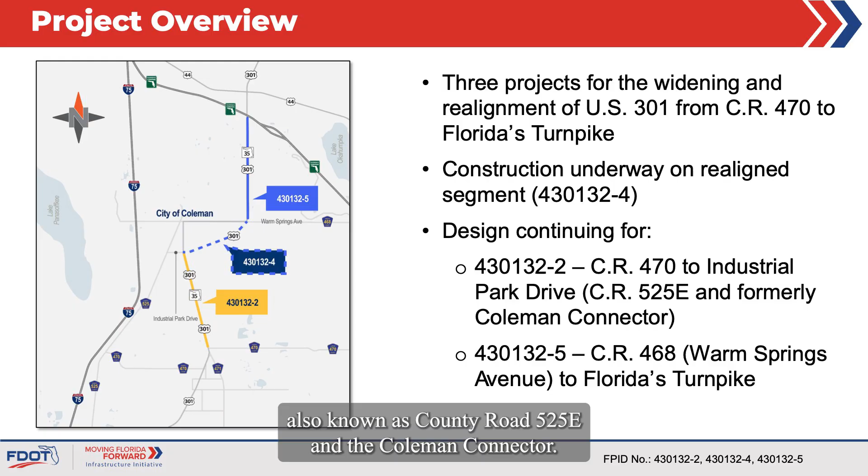At the southern end, Project 430132-2 will widen US 301 from County Road 470 to Industrial Park Drive, also known as County Road 525E, and the Coleman Connector. The other segment is Project 430132-5, which will complete the widening from south of Warm Springs Avenue to Florida's Turnpike.

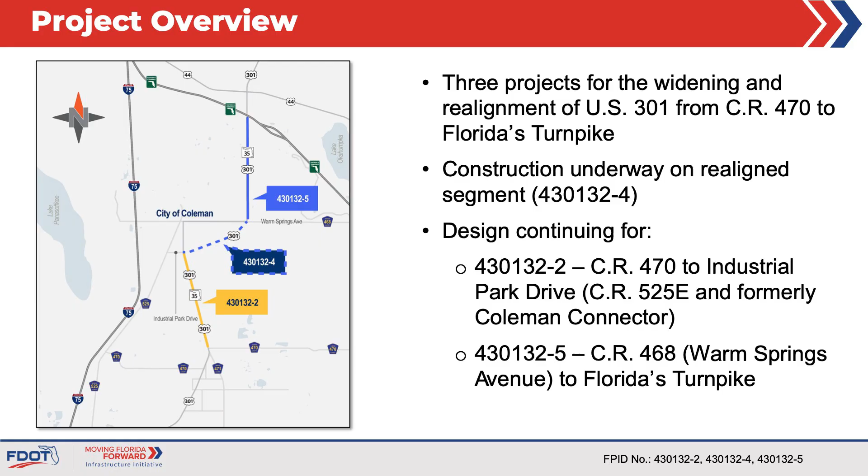The new typical section along US 301 through the entire corridor will have a 12-foot wide outside lane and an 11-foot wide inside travel lane in each direction, separated by a 22-foot to 28-foot wide median. Full and directional median openings, along with left turn lanes, will be provided along the corridor. There will also be 10-foot wide shared use paths on both sides of the road to be used by pedestrians and non-motorized vehicles.

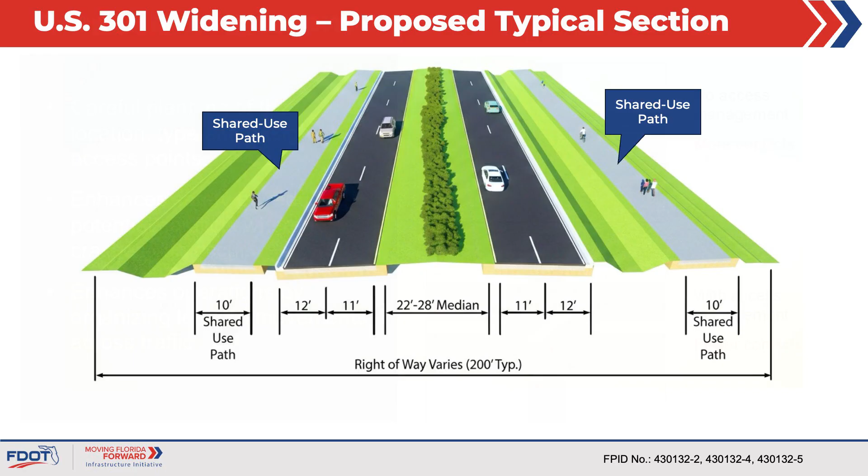One of the most important responsibilities of the Florida Department of Transportation is to ensure that the design of each state road properly balances access and traffic flow. Access management is used to provide this balance. The proposed locations for median openings have been selected using access management principles to enhance safety by reducing the number of conflict points, or places where vehicles could cross paths and crash.

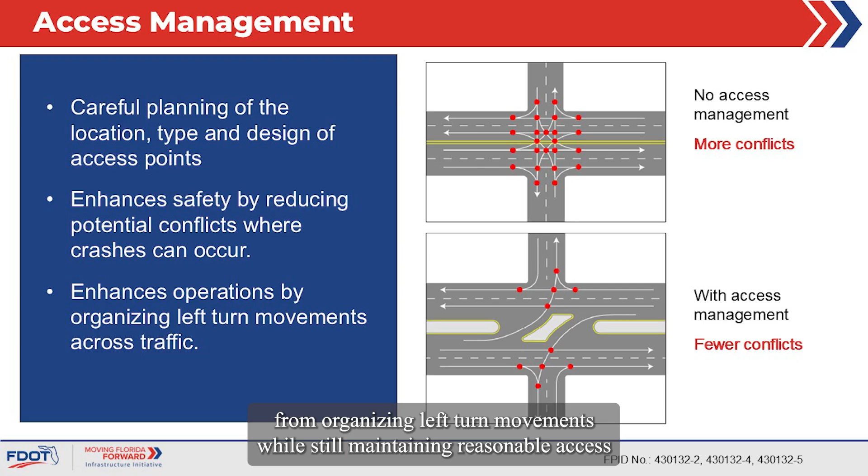The red circles on the diagram on this slide show the reduction in conflict points with access management. Another benefit of access management is better traffic flow resulting from organizing left turn movements, while still maintaining reasonable access to all properties.

First, let's begin with an update on the 430132-4 segment. Construction of the new roadway between Industrial Park Drive and Warm Springs Avenue began in 2025 and is expected to be completed in 2028. During construction, the realigned US 301 will remain closed to through traffic, but will continue to provide access for local residents until the remaining project segments are complete. As part of this work, improvements at Florida's Turnpike have already been completed, helping to relieve congestion in the area.

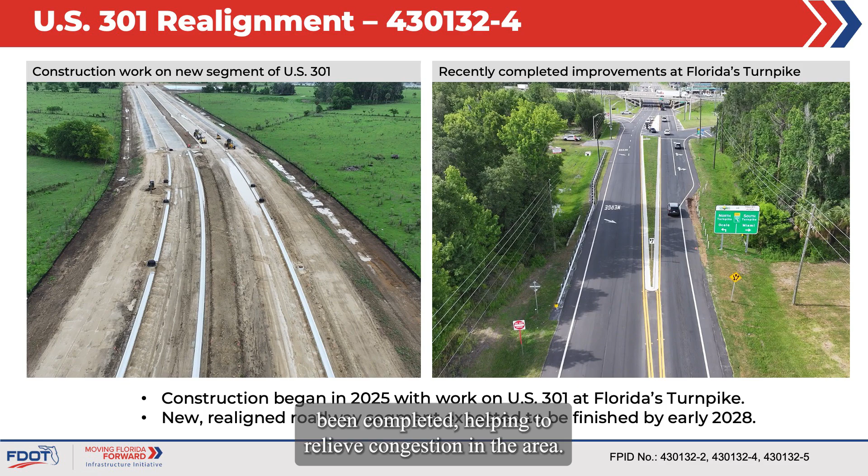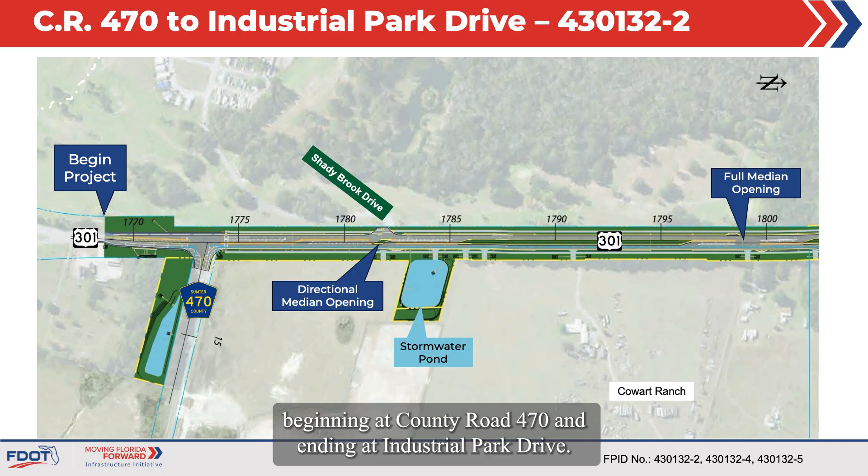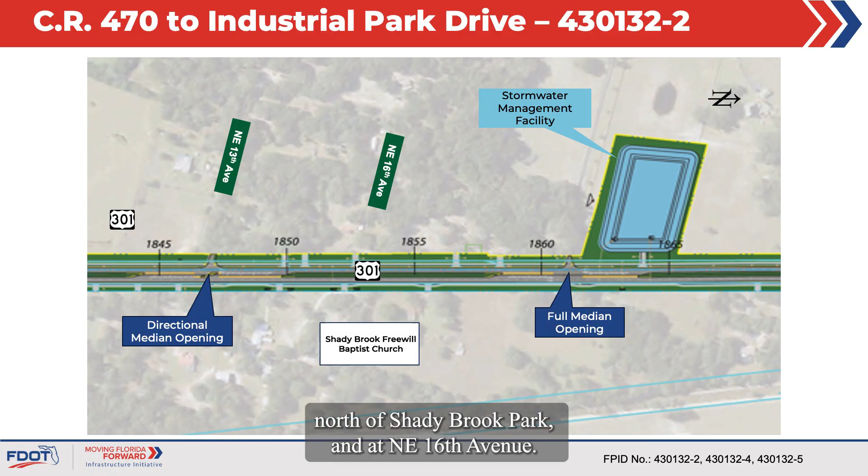Now let's take a closer look at project 430132-2, beginning at County Road 470 and ending at Industrial Park Drive. The aerials on these slides show the planned median openings and stormwater pond locations. Directional median openings are planned at Shady Brook Drive, south of Shady Brook Park, at Northeast 13th Avenue and Northeast 19th Road. Full median openings are proposed north of Cowart Ranch Road, north of Shady Brook Park, and at Northeast 16th Avenue. A new traffic signal will be constructed at the intersection of Industrial Park Drive and the new US 301 alignment.

Now let's take a closer look at Project 430132-5, which starts south of Warm Springs Avenue and will connect to the new alignment. A new traffic signal is planned at Warm Springs Avenue. Directional median openings are planned at Trinity Baptist Church, B&S Auto, south of Northeast 41st Lane, and at Northeast 41st Lane. Full median openings are planned at County Road 521 and Northeast 37th Place. A new roundabout is planned at Marsh Bend Trail.

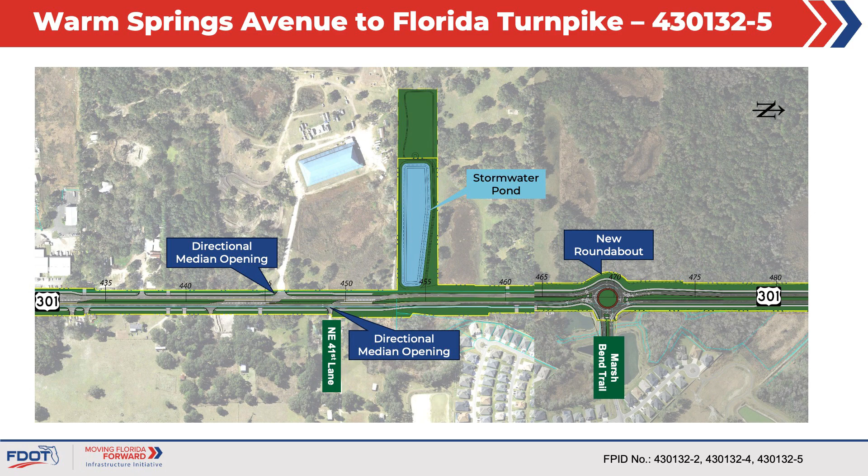The new 2-lane roundabout at Marsh Bend Trail is designed to accommodate all types of vehicles, including large tractor trailers. During design, the department reevaluated intersection options. A roundabout at Marsh Bend Trail was determined to be the most effective option to keep traffic moving and enhance safety. Crosswalks will be included on all 3 legs of the intersection.

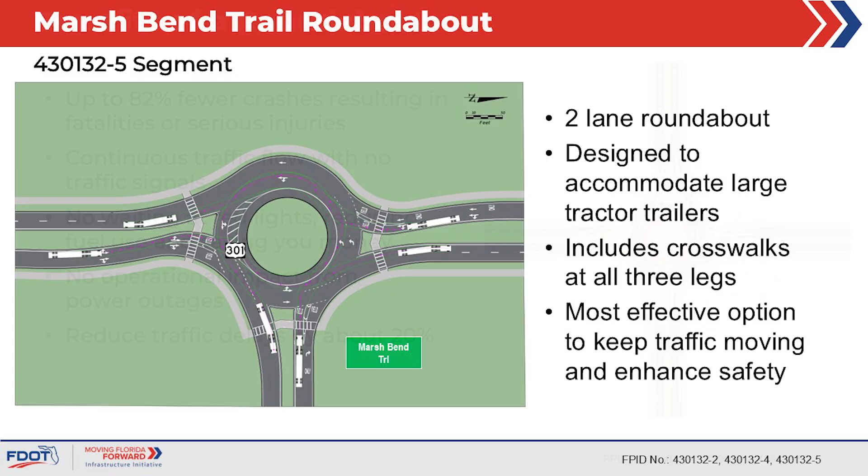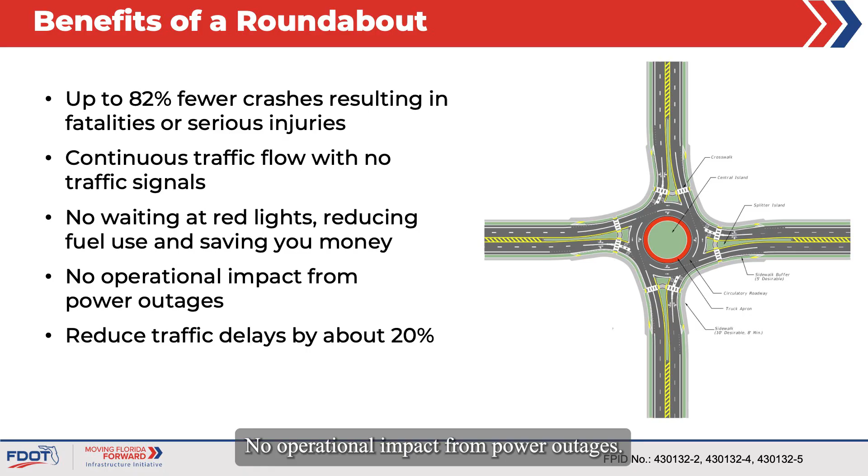Some benefits of a roundabout include up to 82% fewer crashes resulting in fatalities or serious injuries, continuous traffic flow with no traffic signals, no waiting at red lights, reducing fuel consumption and saving you money, and no operational impact from power outages. Roundabouts reduce traffic delays by about 20%.

At the project's north end near Florida's Turnpike, there is a full median opening south of the village of DeLuna, and a directional median opening just south of the Turnpike. The project also includes new traffic signals at the interchange.

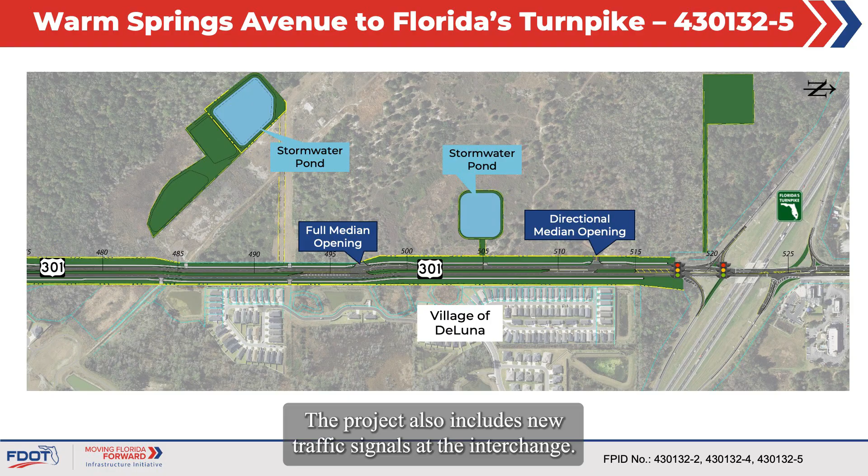Another important feature of the project are new asphalt aprons, which are depicted in the graphic on this slide. The additional paved area provides more space for vehicles making U-turns.

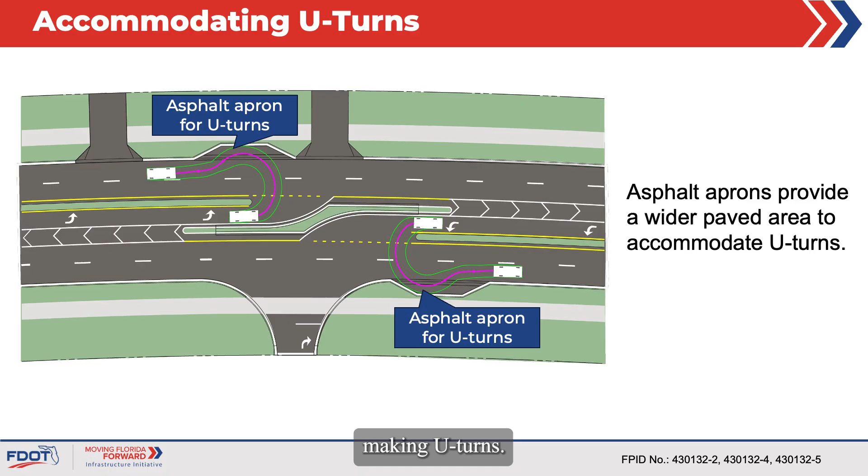Stormwater management is another important component of these projects. The project proposes to upgrade the collection and treatment of stormwater runoff by installing new storm drains and pipes to collect the water and discharge it to 12 new treatment ponds on the project. The treatment ponds clean the water and help control how quickly stormwater is released during heavy rain. There will also be 10 floodplain compensation areas to provide additional green space on the project as a result of unavoidable impacts to existing floodplain areas.

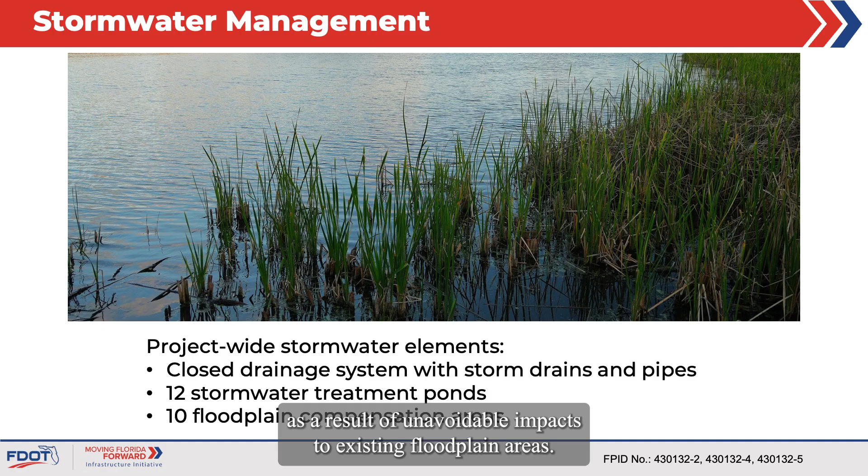As part of the PD&E study, the department evaluated the potential noise impacts. According to state policy, the FDOT can only evaluate the feasibility of including sound mitigation based on existing conditions. The PD&E study concluded no sound mitigation was warranted with this project.

The findings of the PD&E study were published in May 2019, which is considered the date of public knowledge. The FDOT recognizes that many new homes were built after this date. However, according to state policy, the department is not allowed to pay for noise walls for the new developments. The FDOT will be installing landscaping and larger buffer areas and can work with homeowners that may wish to explore private installation.

The Florida Department of Transportation is working individually with every affected property owner and offers relocation assistance to ensure a fair, supported transition throughout the acquisition process. The right-of-way will impact 127 parcels. There are 4 residential relocations and 5 business relocations. All impacted property owners have already been contacted by FDOT. Right-of-way acquisition will follow all state and federal laws.

Construction on 430132-4, the new alignment, began in 2025 at an estimated cost of $26.7 million. Design continues through the remaining 2 projects. Right-of-way is also in progress for both remaining projects with an estimated total cost of $58 million. Construction on the

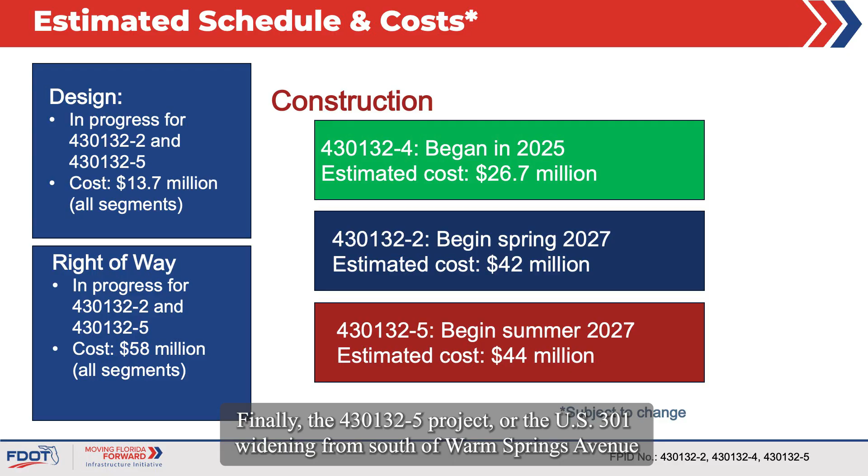Finally, the 430132-5 project, or the US 301 widening from south of Warm Springs Avenue to Florida's Turnpike, is anticipated to begin in summer 2027 at an estimated cost of $44 million.

Your feedback is important, and we want to hear from you. You may speak directly to project team members, submit written questions or comments, or provide comments online through the project website at www.cflroads.com or during the webinar. While comments and questions are welcomed at any time, those submitted by August 17th will be included in the public record for this open house.

To submit a comment or question during the webinar, click on the Questions section of the GoToWebinar control panel. You may also reach FDOT Project Manager Derek Dean directly by email at derek.dean@dot.state.fl.us. Or by U.S. mail at the Florida Department of Transportation, 719 South Woodland Boulevard, Mail Station 542, DeLand, Florida, 32720. You may also call Mr. Dean at 386-943-5161 to provide verbal comments during normal business hours.

This public meeting was advertised and is being conducted in accordance with state and federal requirements, including Title VI of the Civil Rights Act of 1964. Public participation is solicited without regard to race, color, national origin, age, sex, religion, disability, or family status.